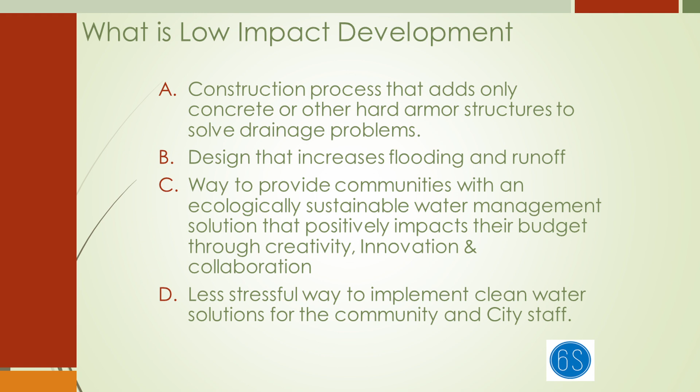Okay, C, hold on, drum roll. It's correct. So, back there? Back in the back? All right, good deal.

So I want to start off by introducing what is low impact development, and show you a project specifically in Harris County. We work with a lot of municipalities on implementing these types of design strategies, and really understand why a municipality might want to do that type of design.

A lot of times when you hear green, you think Tesla, you think curlicue light bulbs, you think more cost, more expense, longer ROI. But when it comes to drainage and stormwater management, that's generally not the case. Most of the time, there is an ROI that really impacts detention volumes and water quality and right-of-way, those sorts of things that can be of value.

And I want to show you one example that really set Harris County off on a path to doing more and more of these types of roadway projects, as well as the city of Houston. So why low impact development?

These might be some bold claims. You may think these are bold claims, but: reduce construction costs, reduce maintenance costs, safety. How could it provide more safety, right? Practice what we preach. Cities and counties are more frequently talking about doing things that are green and implementing green things, but how can you really work it into CIP projects? And then, proof of concept.

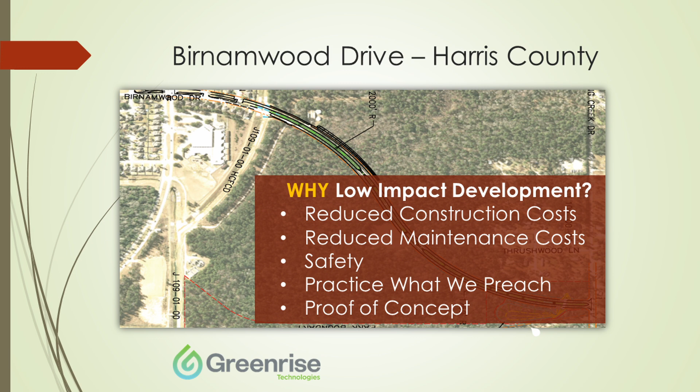So this particular project was a 3/4 mile roadway stretch called Birnamwood Drive in Spring, Texas. Just to give you an idea of the cost savings, these were 2011 prices. Essentially, there was about a 7% cost reduction per mile, or $192,000 in savings on that particular roadway.

Essentially what we did was remove a detention pond that would have been required for floodplain mitigation, and we worked it all into the right-of-way. Instead of having a crown center median, we had an inverted center median where we could handle the 100-year flood within the inverted center median.

Not completely different than what you would see on any DOT project between here in Houston or here in San Antonio, not a lot of difference. The primary difference was that we used biofilters and bioswales in order to slow the water down, extend peak flows, decrease time of concentration -- increase time of concentration and decrease peak flows.

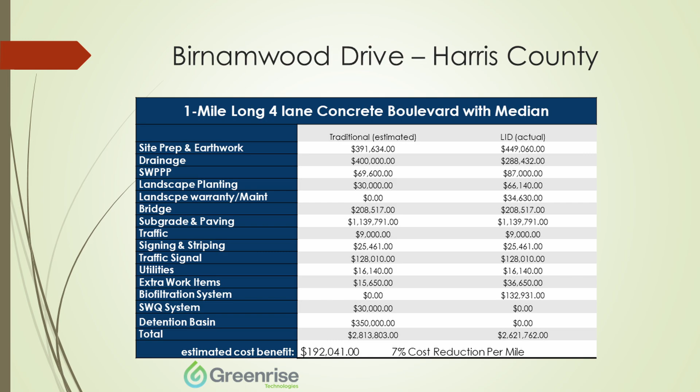Essentially what that did was cut our detention requirement in half, so we didn't need to store as much water, and could fit it all within the right-of-way. I mentioned safety as it relates to that. One of the things we could do is manage the entire 100-year flood within the right-of-way, as opposed to just transferring the 10 or 25-year storm to a larger facility, which a lot of times would flood the roadway. We were actually able to keep the roadway dry even in the 100-year event.

I think we're on to the next. There's a lag. There's a lag between the two.

All right, so I'm going to talk a little bit about drainage problems and just a few key projects that we worked on. This is one that we did for the City of Leon Valley, if you're familiar with that -- a suburban San Antonio, Texas, small community.

They had some issues with this. This is Evers Road, just near their public library, just north of 410. They had issues with this constantly flooding, right? So they had to call a fire truck out multiple times a year, several times, and they needed to solve this issue.

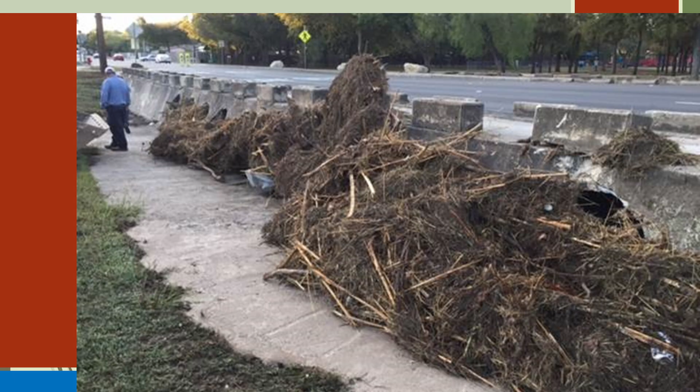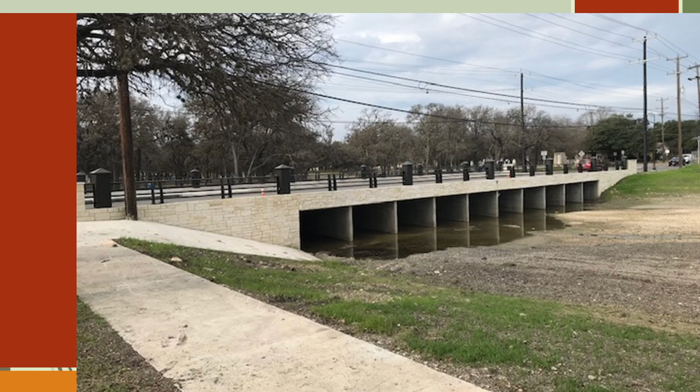There were some other issues they were having with this -- constant maintenance on this thing. Just to give you a perspective, this is Huebner Creek, with about an 8-square-mile drainage area, and this road was just an undersized crossing, basically like a speed bump to this 100-year flood. This is what it looked like in a major storm event.

So they approached us, and what we ended up doing was looking at the H&H analysis for this and what our constraints were. With communities like this, we have a lot of development upstream -- this is north side of San Antonio, and everything upstream of this is pretty much developed. So you kind of see the effects of no detention upstream and those kinds of issues.

What we proposed here was, with a budget of about $2 million, what can we do to solve their problem? So what we ended up doing was just proposing some boxes, opening it up, and maximizing the conveyance through there. And this was kind of the end result of that project.

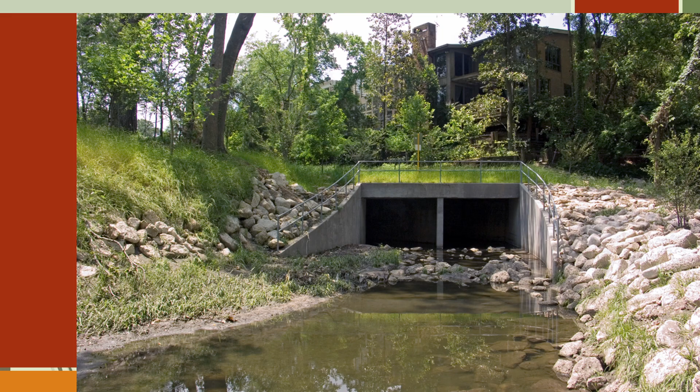This is another one in the City of San Antonio area -- this is Universal City. This project had some serious erosion control issues. So what we ended up doing is extending some culverts in this area, redoing the head walls, and adding some permanent erosion control measures here.

Another thing that we do is trail projects. We work with the City of San Antonio and other communities, and we like to incorporate a lot of the LID products that David talked about—anything from pervious pavement to pervious asphalt and bioswales, those types of products.

And just to get some of you guys involved, does anybody here have a drainage problem or issue they can share that might be able to be solved with some LID solutions? I think I saw a hand go up somewhere back here. Anybody?

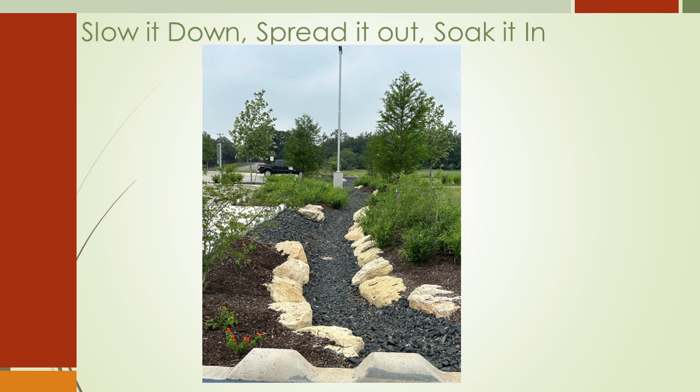This is one here for a parks project in the City of San Antonio. We try to do things green—there's different committees and everything that we run everything through. In this park project, again, we try to slow the water down, let it soak in. This one here is over by Leon Creek, is where that's at.

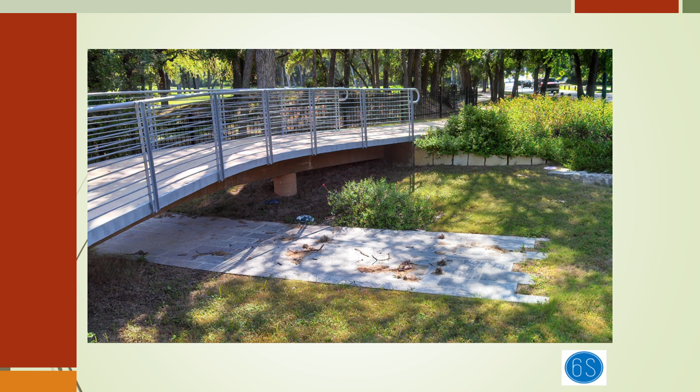That's why I invited him here to be with us today and talk a little bit about the teamwork in this. We designed this trail over this area off Mulberry by the zoo. Underneath here, this area would always pond, but we really didn't have a way to get the water out of the area, so what we decided to do was capture some of it underground. Joe, go ahead and go to the next slide.

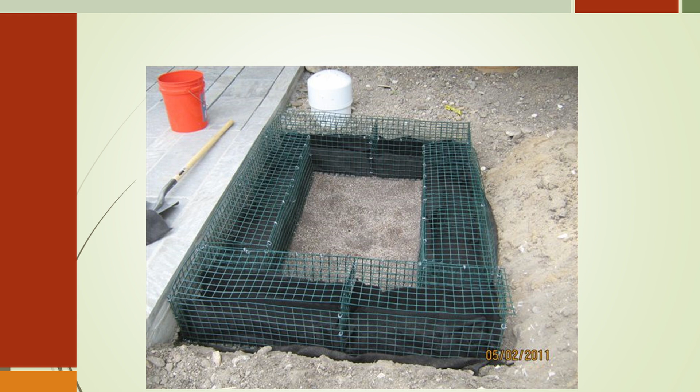So we excavated out in there, and we create baskets, then we have select fill and materials that go in here to help the water infiltrate, just so we don't have a mosquito bed—because as water goes standing around, we have our little buddies. So we do that to try to help get rid of this water. You can see the basket, and then we have another drain filter there. Joe, go ahead and go to the next slide.

So if you took a cross section of it, we have a special soil media that goes down, and there are different ways and processes now that you can utilize. After this presentation, if you have further questions, David helps in marketing of those types of products.

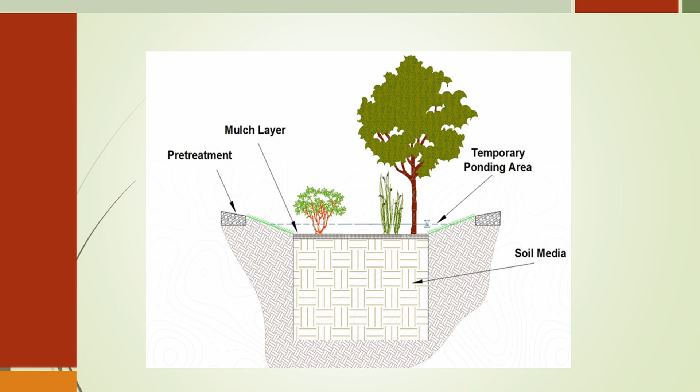But you can make these things look natural, get some of the proper vegetation. As engineers, we work with all different types of landscape architects, geotechnical engineers, and experts in the field that help us prepare the proper subgrade.

This is just another section, the one we used on the project I just showed you a moment ago, we got from David. I just call them milk crates, is what they look like to me, that were underground but allow that area to hold the water as it soaks down. So it's also filtering, which is good.

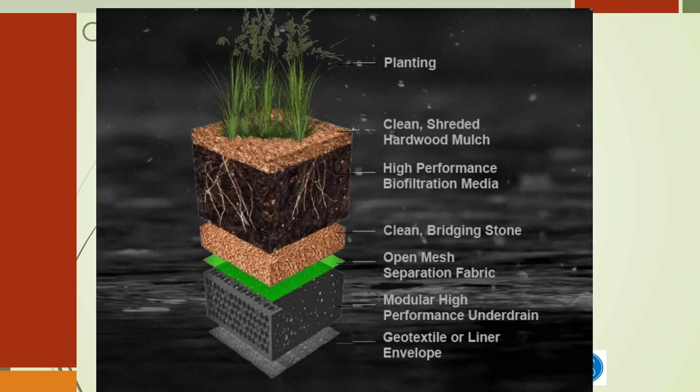So when I start talking about LID to them, they're scratching their head. And when we're talking about drainage, I do a little bit of training and a little bit of learning too, because everybody's got a different way to solve a problem. When you go into a county, you don't want to just go in as a know-it-all, you want to go in to help solve problems. You do bring some fresh ideas, but it really is a teamwork situation to solve a problem.

And so in this case, we're working on the courthouse. For those of you who've been around the Tilden courthouse in McMullen County, we've redone all the roads. We put the first subsurface system in Tilden within the past year and a half. We've done probably about $6 million worth of roads, doing another 6, and we've pretty much redone all the county roads.

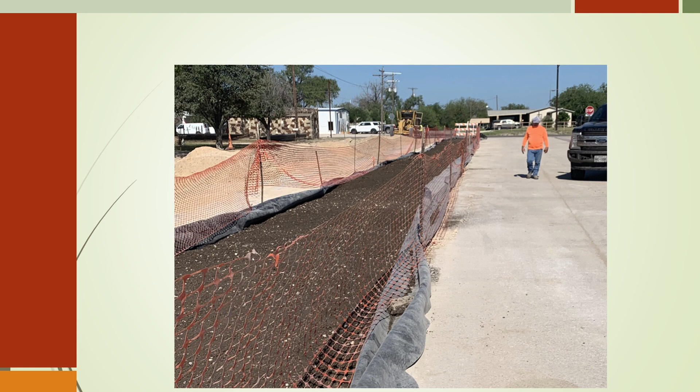So after we get it all covered up, you can see some of the filter media there. There's different ways you can do a lot of plantings — you can also do like a xeriscape type of project to help keep costs down. This is almost final, we don't have vegetation or anything along there yet. I think we've got some river rock and stuff now. That's the way the judge wanted to go there.

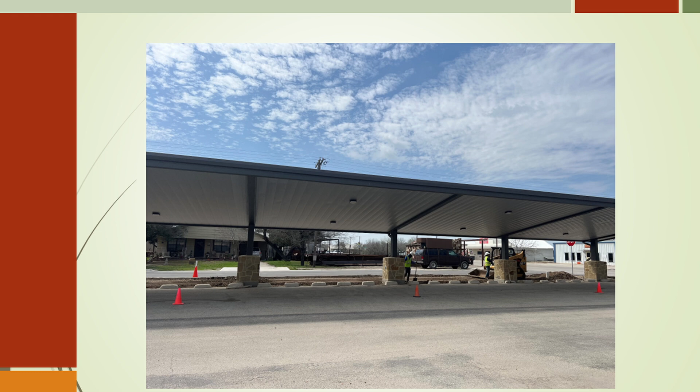So as you can see, there are a lot of different applications, and we appreciate you speaking up for a project. I think we can all find one around that might need some creative type of solutions. So with that, we would like to open it up, see if there are any questions here for us today.

The problems that we see? Well, as this young lady here noted, there's always a localized type problem. Smaller communities like McMullen County, Tilden, Calliham, Jourdanton, Balcones Heights — there's a bunch of them that we work for. A lot of localized drainage as well. Small systems are needed to help pick up and solve problems in residential areas. We see a lot of that.

We're working on an MPO project for Balcones Heights right now, where we're trying to use LID because the city of Balcones Heights doesn't have a ton of money. They have the portion they're getting through the government, through the MPO process, but it's expensive to come in and put in a large subsurface system. Then there's TxDOT requirements you have to fall within for paving, grading and drainage, and you have to have dry lanes in a roadway. So you have to size these systems, but every time you start putting more concrete and piping in the ground, your project cost goes up.

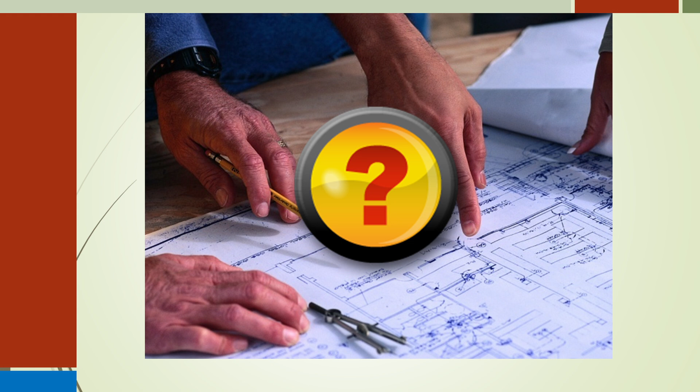Well, I'm really picky on the contractors, to be honest. Joe and I both work together on these projects. As far as lessons learned, one comes to mind from our work with City of San Antonio Parks. They're really particular, they love LID, and maintenance is their concern, but you have to follow it through construction. They had an incident where they were supposed to put down permeable concrete, but found out after it was placed that it wasn't actually permeable concrete. So that's a lesson learned, making sure during construction you've got inspectors or eyes on the field for that type of thing. It does happen.

To tie that together, Joe's right. You want a good inspector in the field, and you want very good specifications. Your engineer, architect, or landscape architect needs to be present on the job. Just doing things from the office doesn't always cut it. You need to be watching and checking the product that's placed in the field. I think that's something Joe and I and our team do a pretty good job of.

Another lesson learned from that same park project for the City of San Antonio: the material they used, a very loose gravel in the pavers, became a maintenance nightmare. After a large rain event, it would wash out. So on the last one, we changed some of the pavers and did some different things so they wouldn't have that problem. As time goes on, people figure out different ways to tweak a solution.